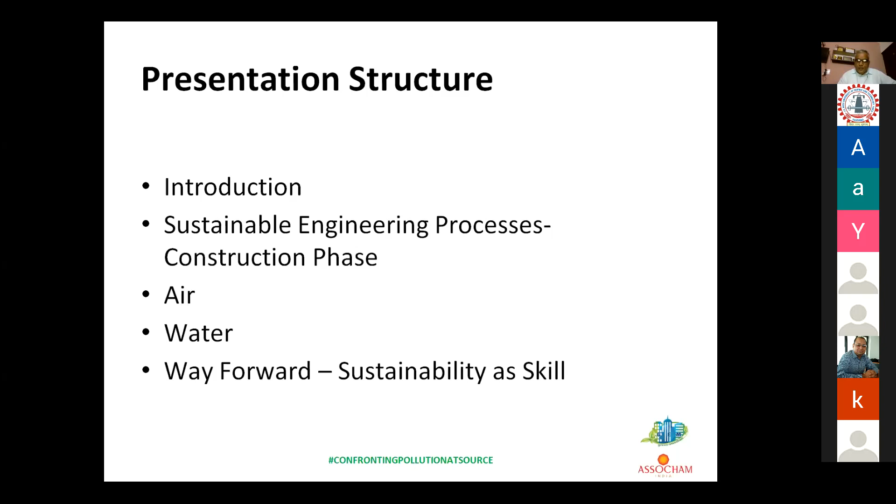This is the presentation structure of my talk today. I thank YMCA Faridabad as well as the team of GTS. I'll be talking on sustainability during the construction phase. We'll follow this structure: I'll do a small introduction about sustainable engineering processes and what the construction phase is, I'll talk about air and water and how they get affected during the construction phase, and I'll talk about the way forward for sustainability as a skill. I'm a civil engineer and I've been doing lots of projects, so my program is more on sustainability and construction as such.

We have been hearing a lot about green buildings, smart cities, green cities. So what's the process of a project? Whatever is happening, whether it's infrastructure or real estate, the project goes through three or four phases predominantly. First is the design phase, when designers and owners get involved and set the context for the project. The design phase is usually 1 to 2 years, when the details of how the project will shape up get decided. Over the last 20 years, sustainability has been in question in the domain of construction. In the design phase, somehow architects have built capacity, and many bodies like IGBC, ASSOCHAM, USGBC and GRIHA have come up with rating systems. So in designing a project, people are talking about sustainable design and efficiencies for water, energy, and waste management during the design.

I will skip the second part because that's our topic. During commissioning, people commission it to the design. And during the fourth part, the operations and use phase, we can see a little bit of effect, although if we get into the details, there is very little capacity building in terms of the end user. Many end users don't know how to use that green building or how to maximize its efficiencies. So in the operations part, a lot of capacity building has to be done.

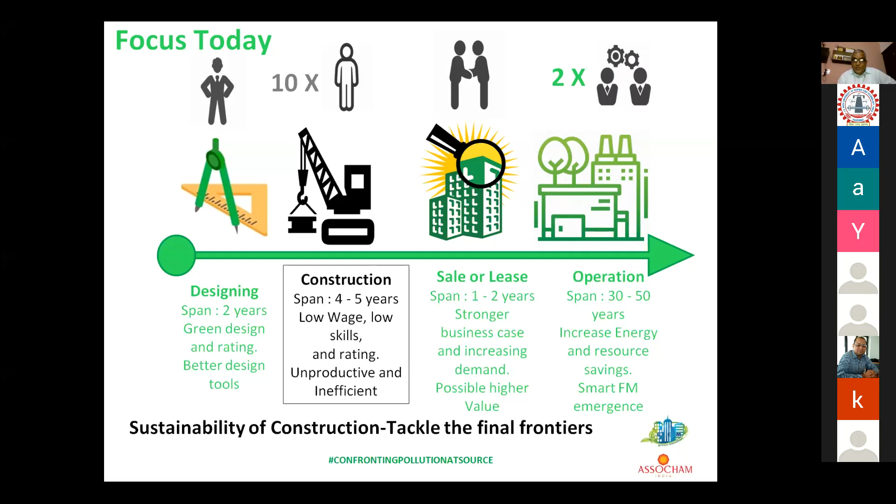If I have to say, I'm sorry to say this, but even the bigger companies—I'll give you examples as I go through the presentation. So the fundamental issue is: we design a project as a green project, operations is a green project, but we work in silos. We don't construct it without harming the environment, water or air, and even construction and demolition waste as such.

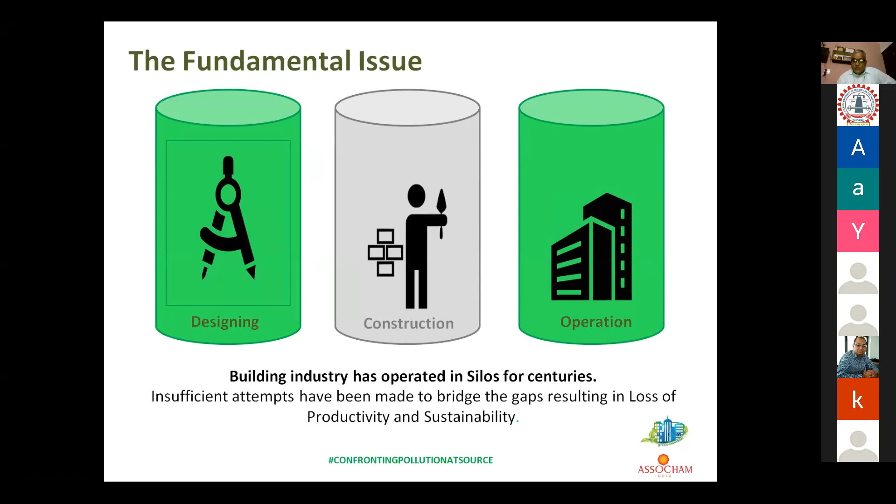Why does this happen? Because all the project proponents work on constraints or risk factors, and if those risk factors connect with the cost or time of the project, people worry about them. But air quality from construction or water for construction are never taken as risk factors—people think they don't affect cost or schedule, but that's not true. I'll explain this as we go along.

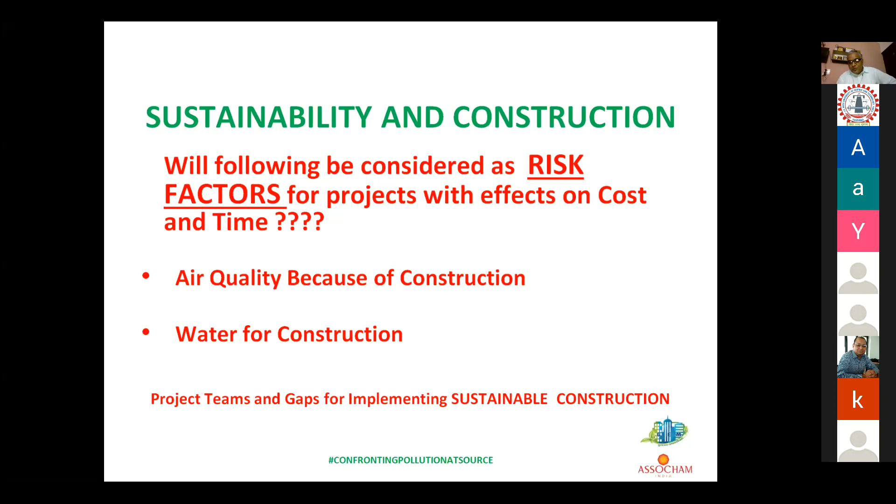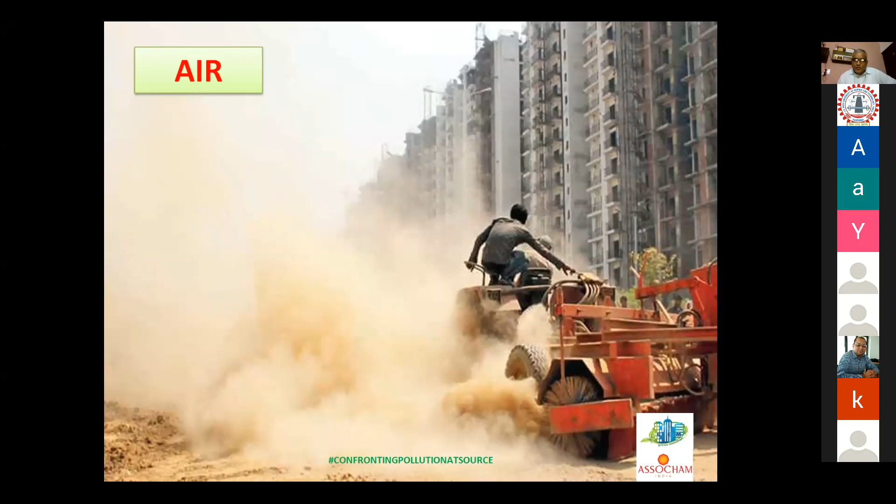We start first with the air part. This is a common sight in Faridabad, Gurgaon, or Noida during summers if you go around construction projects. And this is a common headline in the media during November: as the Graded Response Action Plan of NGT sets in, schools are shut and construction works get stopped in Delhi. Why does this happen? Because PM2.5 and PM10 levels get ahead of what's desired, and the response is orchestrated.

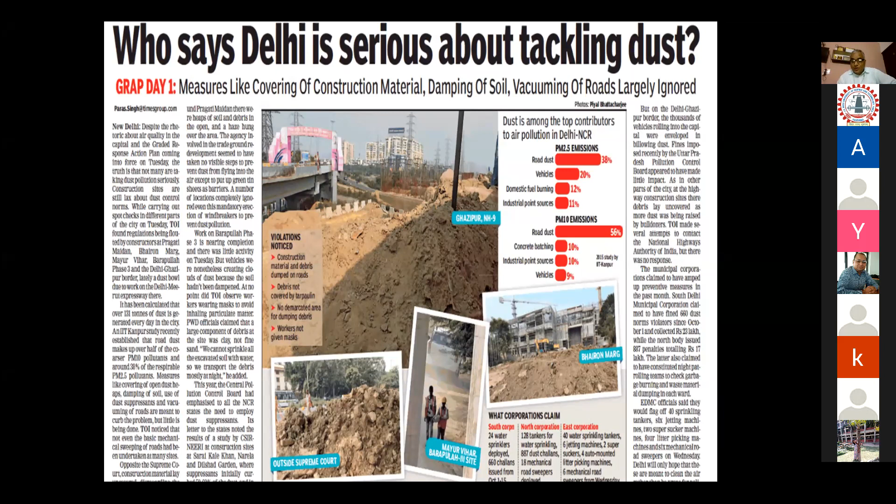This year we will see construction starting for Jewar Airport and Central Vista, the new Parliament building. So will these projects contribute to air pollution or not? It's yet to be seen—or will they do sustainable construction and mitigate construction dust as they build? So what's the real connection between construction dust and air quality?

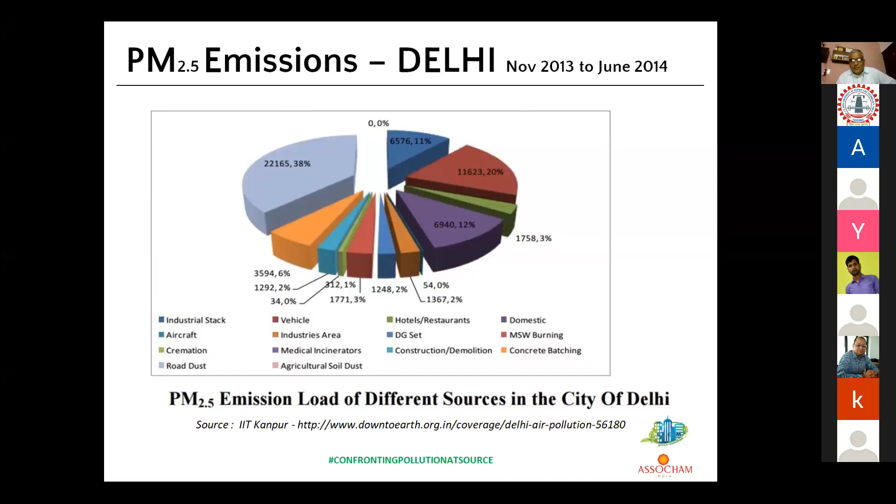This is an IIT Kanpur study. If you see this PM2.5 breakdown, road dust is 38%, and construction and demolition is very small, just 2%, with 6% from batching plants. For PM10, it's a bigger pie—road dust is 56%.

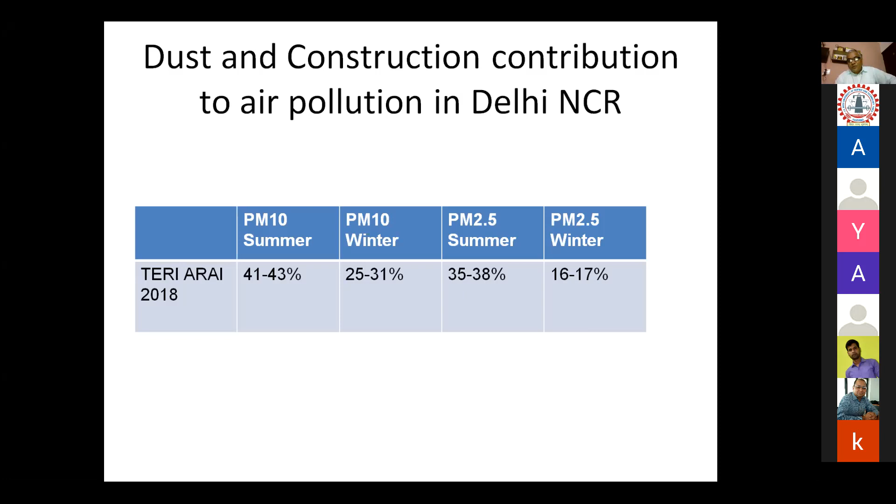Why is this happening? Because there are no studies available, no construction companies coming forward saying, 'We can show you the way of constructing where we can mitigate this, where we won't contribute to that—let the construction dust not escape from the construction boundaries and go out.' Please remember, once construction dust crosses the construction boundary, it becomes road dust or dust in the atmosphere—outdoor air quality. This is why we call dust a problem.

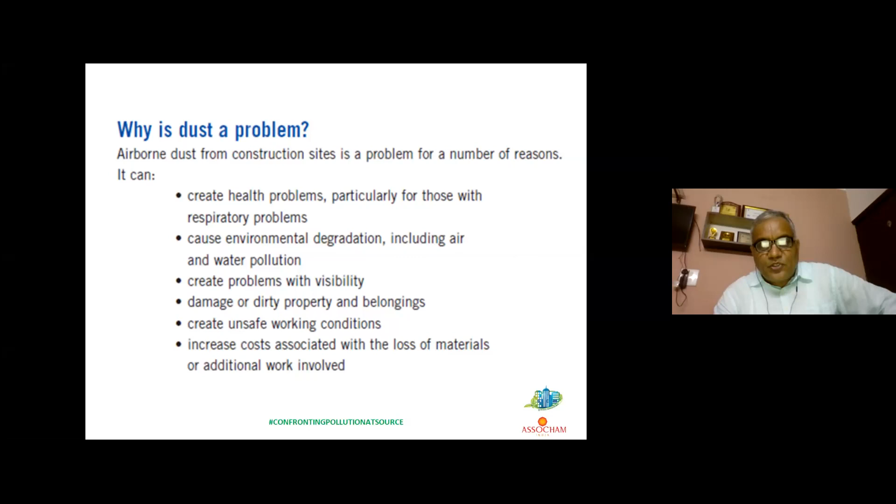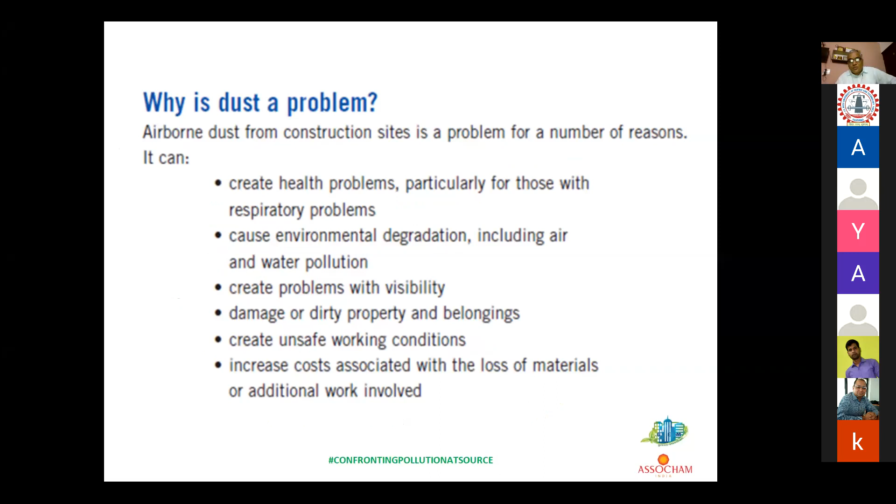Airborne dust from a construction site is a problem because it creates health problems like respiratory disease, causes environmental degradation, air and water pollution, and problems with visibility. It damages and dirties property, creates unsafe working conditions within the premises, and increases costs associated with loss of materials or additional work. It's caused by demolition activities, site preparation activities, vehicle movement, and uncovered stockpiles—these are a few of the reasons it happens.

So what are the constraints? Why are we unable to work on controlling construction dust so it doesn't leave the construction premises? In India, climate and weather is one constraint because we live through many climate zones. Cost is again a constraint because we try not to spend money on environmental aspects. Limited knowledge is also a constraint because nothing is happening or nobody is talking about this during studies, during internships, or while projects are happening.

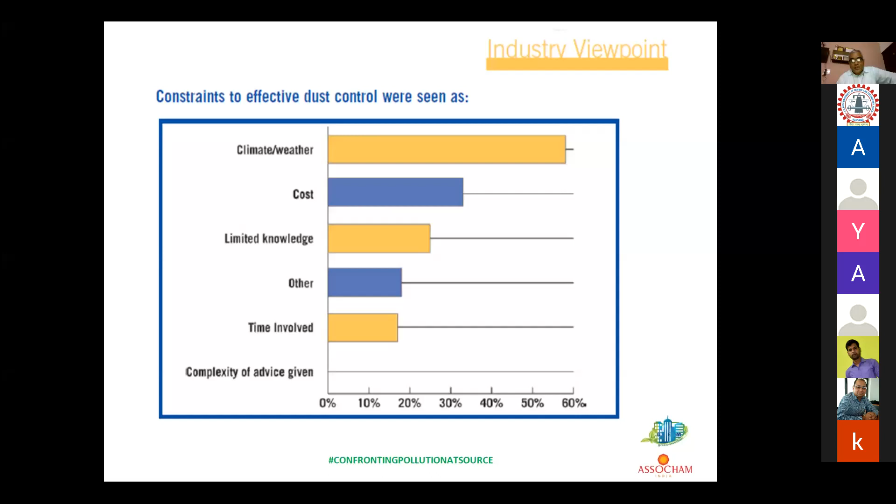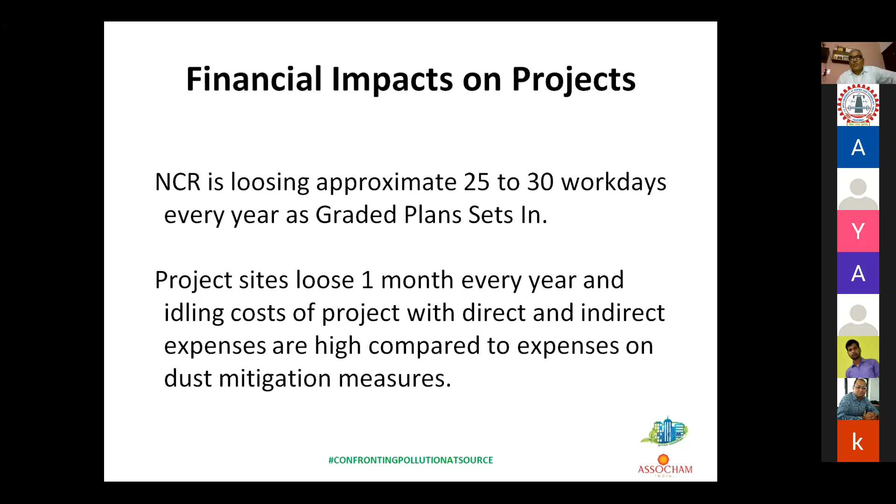Time involved is again one of the constraints. Coming to the financial impacts, every year 25 to 30 work days are lost in NCR, and the same will be the condition in 122 non-attainment cities in the National Clean Air Programme. Project sites are losing 1 month every year, and if it's a 5-year project, it gets extended by 6 months, adding a minimum of 10% to the cost of the project. If it's in the contractor's scope, the contractor loses his construction margin. If it's owner's scope, then the cost of construction goes up.

So what are the ways, and why are things not happening as they should be? Why is sustainability not setting in? The National Building Code mandates monitoring of air quality during construction twice a week. Trust me, I've been working on this subject for the last 5-6 years, and nowhere, none of the project sites have these outdoor air quality sensors. Once they don't have outdoor air quality sensors, nobody knows what the air quality is within the project premises.

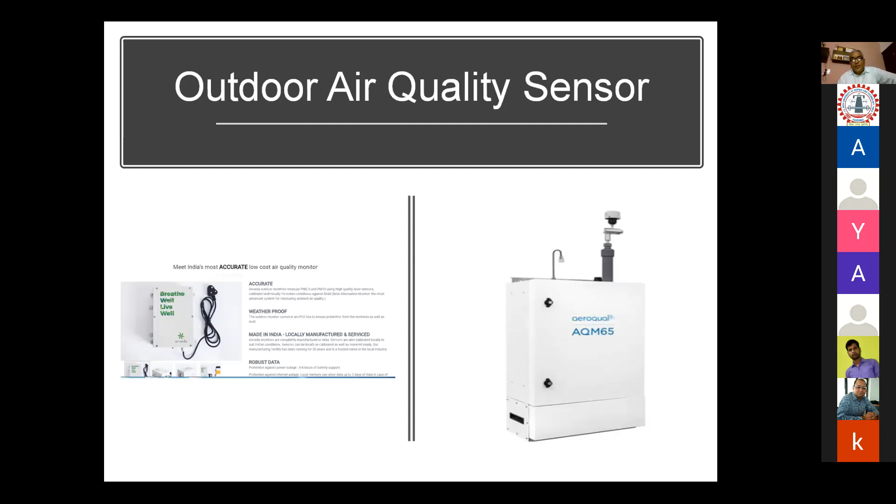So whatever is happening at projects, because nothing is being measured, there is no data, nobody can go to the Supreme Court or NGT. Even bigger companies like L&T can't go to the Supreme Court and say, sir, the outdoor air quality AQI of Delhi was 200, but within my premises it's 175, please allow me not to stop the work, because we are not measuring the quality of air within our building projects. We are doing fogging.

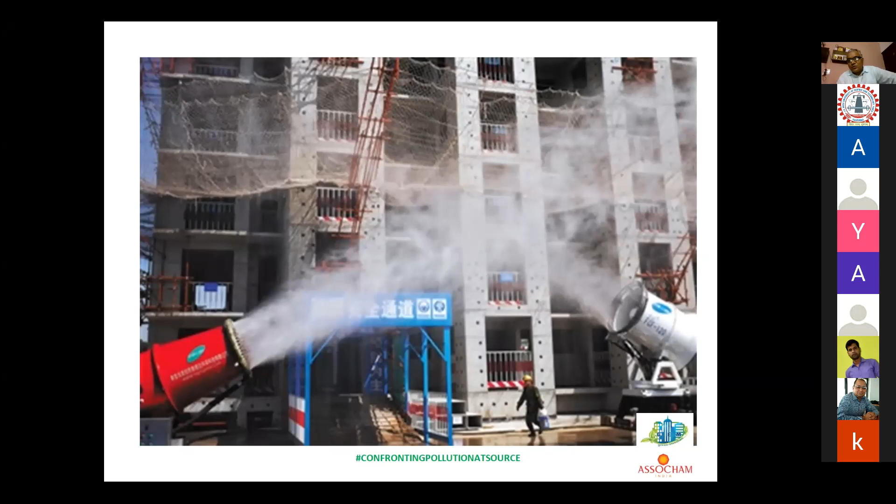These fogging machines have been mandated, but again we have limited knowledge of how to use them and which activities are producing the construction dust. Capacity building of project members, the people working on the project, is lacking. Nothing is being taught, even in educational institutes, about air quality, construction dust, and tackling construction pollution. There is no subject on this at all.

This is fogging during the demolition that's happening. These photographs are not from India - you can see them, you can feel them, because this isn't happening in India. We are ready to copy elevation or designs from how construction happens outside India, but we are not happy to construct the way they construct.

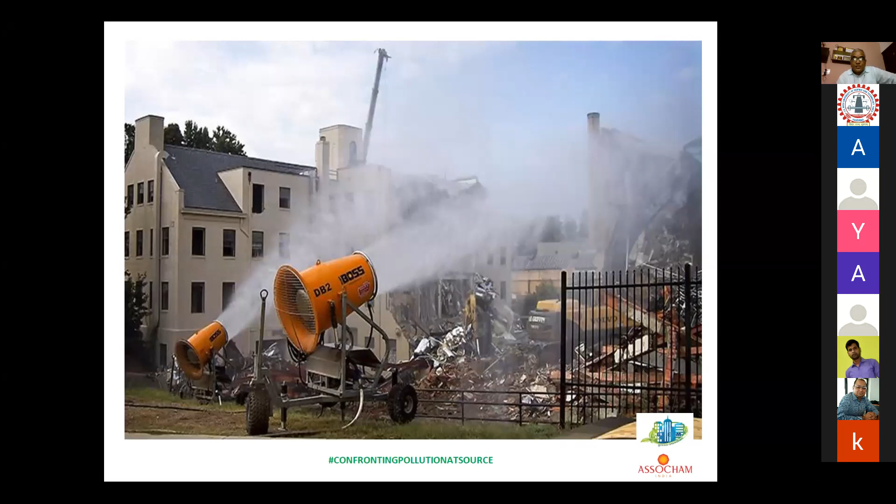They use this machinery to their advantage. We are glad to share that the Delhi Metro procured one last year, and this machine, a fogging machine, was installed at a construction site at Dwarka. Now these are a few of the things which we can do.

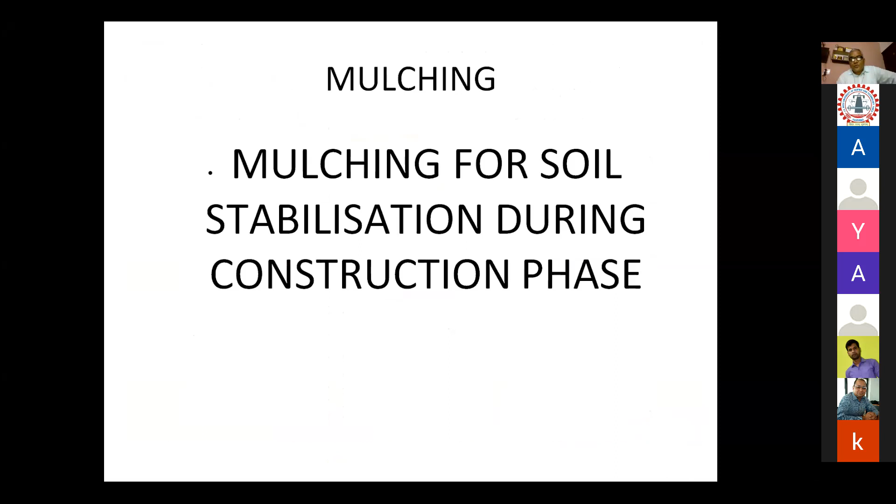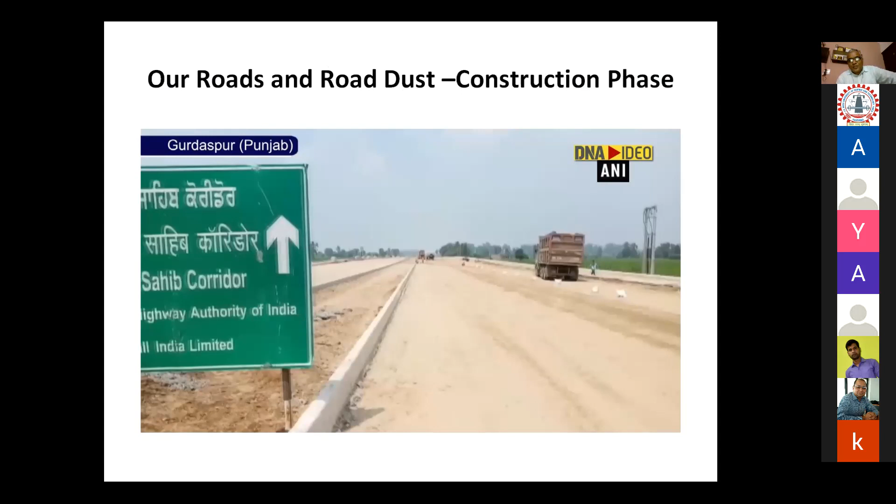I will show you the common techniques which should be used for tackling construction dust. This is how we do construction - this is a photograph from the Kartarpur Sahib corridor, a very big named project that happened in Punjab. This is how we did our construction, and this is how construction happens outside, where mulch carpets are placed so that the loose soil doesn't get into the air and doesn't contribute to the air quality inside.

We are troubled by the burning of plants that happens in Punjab or Haryana during winters, and the same material can be used to construct these mulch carpets - the leftover pieces from the harvest yield, or what we call rice roots, that remain and that farmers burn. So this is the same thing - we need to create the mulch carpets.

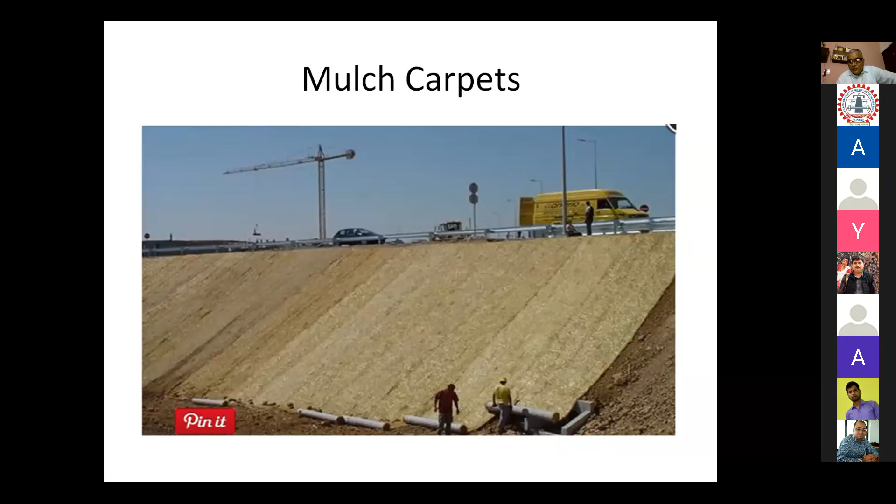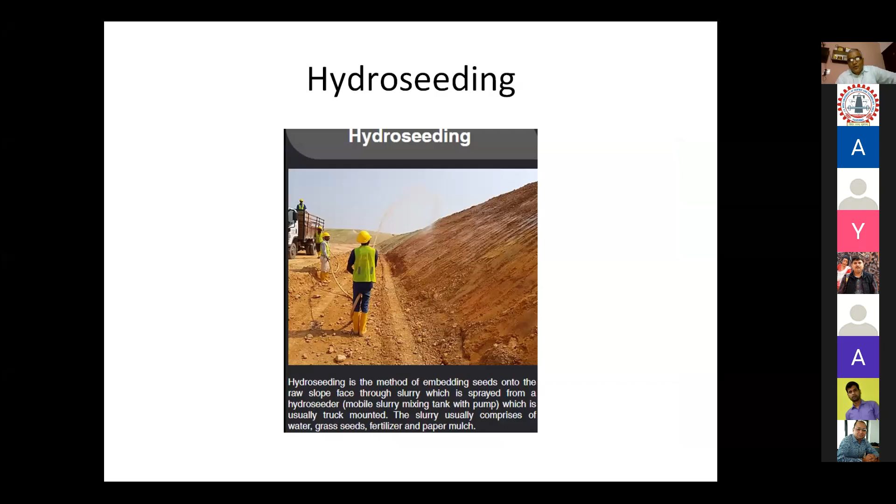Hydro seeding - we don't do hydro seeding. It's a very simple process to stop air, to control the loose soil, control the air. It's very effective - the cost comes to less than 0.50 paise per square foot, but nobody uses this, similarly hydro mulching or soil erosion control. These are a few of the techniques which can be used in India, and we can work on sustainability during the construction phase for air quality. This was my first part.

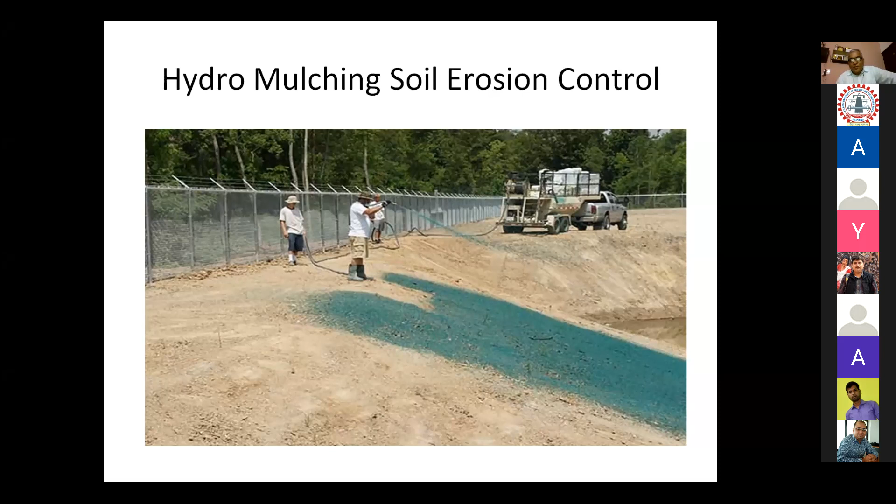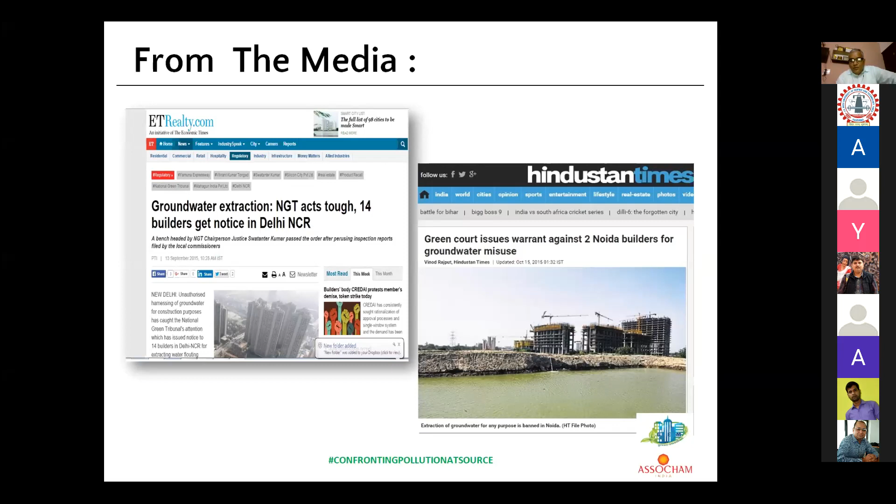Similarly, I will do a small discussion on water also. Groundwater extraction has been banned, and in NCR and many places in India, we are not supposed to withdraw or use groundwater for construction. In Noida, we are losing 3.87 meters of groundwater table every year.

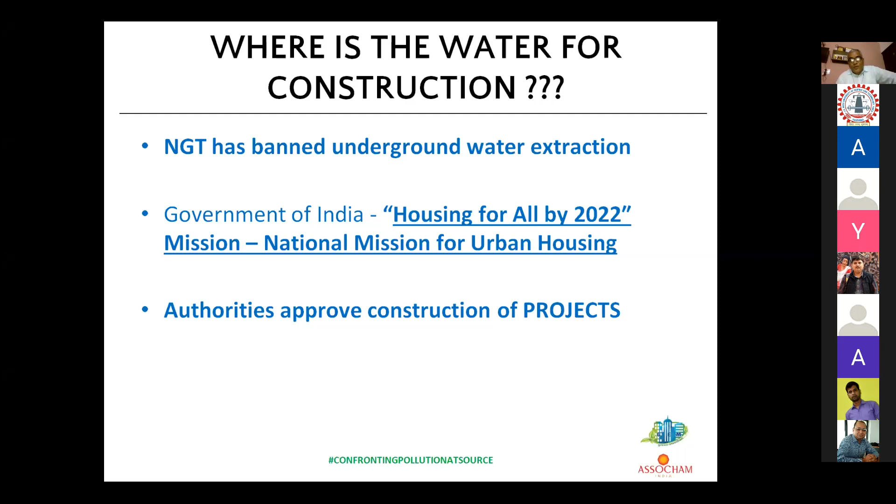Now, where is the water for construction? If we have banned underground water for construction, and the government wants to do housing for all, there's this Smart Cities mission where lots of infrastructure has to come up - if there's no water to be extracted from underground, and we don't have water in rivers, from where will the water come for construction? The question is, how much water do we need for the construction?

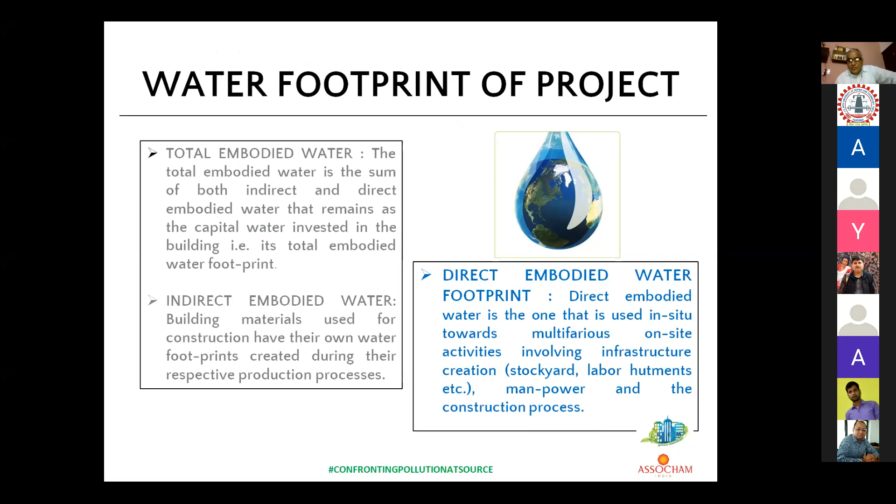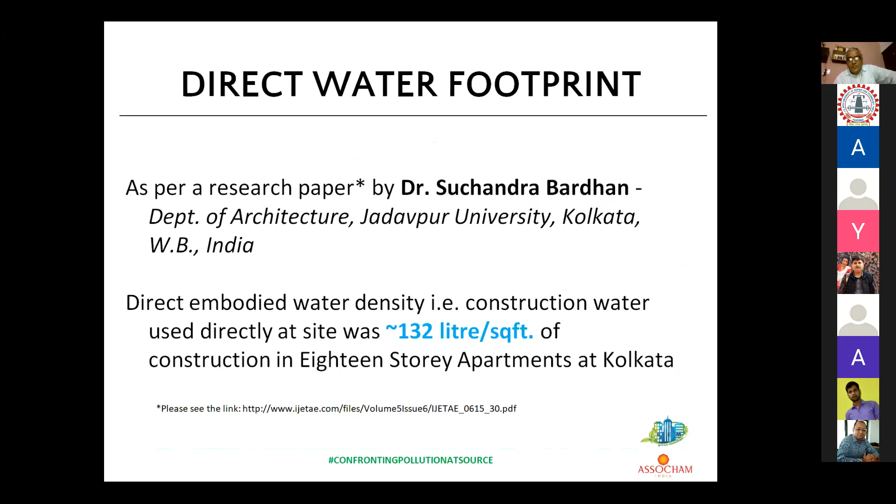No studies are happening on this; there are very few studies. Only 3 studies worldwide have happened, and one of them is from Jadavpur University by Dr. Suchandra Bardhan, who concluded that 132 liters per square feet of water is needed for a multi-story construction. She did this study in one of the multi-story apartments in Calcutta.

I did a few pilot studies looking into the theoretical requirement of water based on water-cement ratio, and I found that we need only 60 to 70 liters per square feet of water, depending on factors like where the batching plant is located, or if the workers are staying within the project site or outside. So there was a scope of saving 80 to 100 liters per square feet of water.

I did a study in Greater Noida with one of the leading builders, I won't take the name. The theoretical requirement, allowing for 20% wastage, was 60 liters per square feet of water, but they had consumed 250 liters—4 times what was needed. So 3 times the water they used was wasted.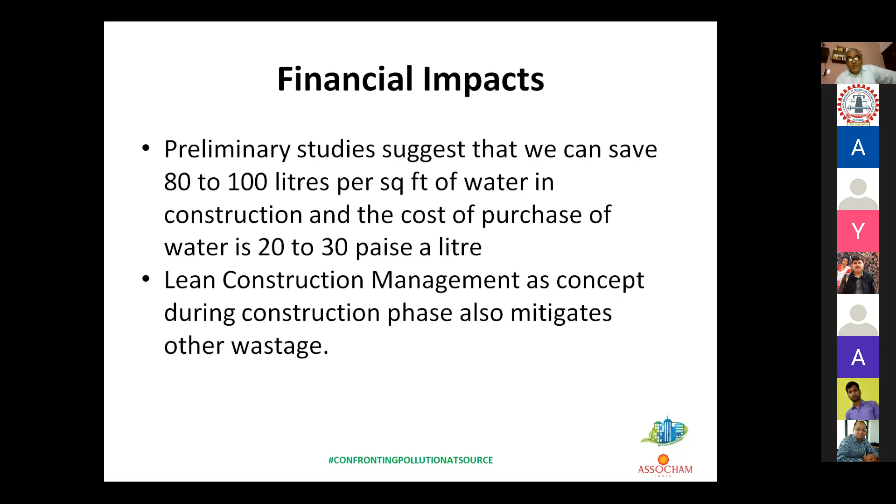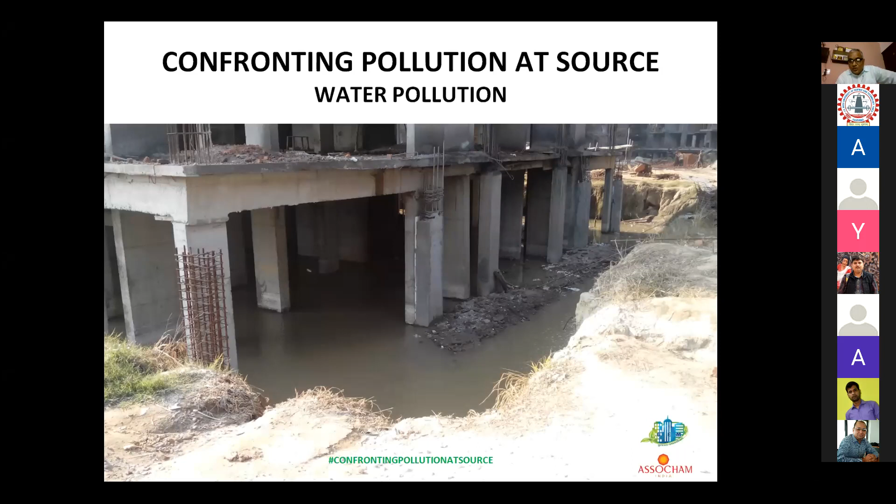So if the water is getting wasted, where is that water going? If you go to a few project sites where water is being wasted, you will come across scenarios where water gets stranded in the basements, or water puddles form during construction. This is all water that was not needed to be spilled at a project site.

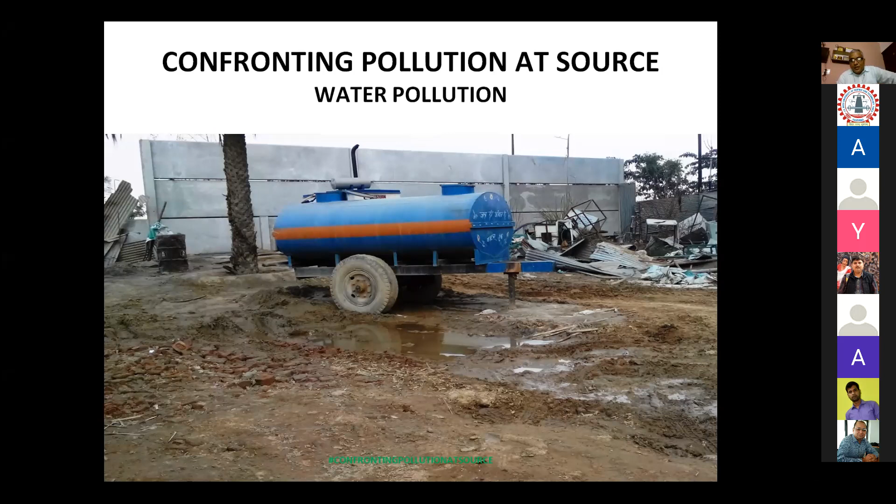So I've shared the problems of sustainable construction practices. What's the way forward? It is efficiency improvement for all teams towards sustainable construction practices, creating awareness with site staff and site execution teams, following intelligent utilization of water during the construction phase, and measurement of energy and water consumed during construction. In sustainability, we very well say that whatever is not measured cannot be managed.

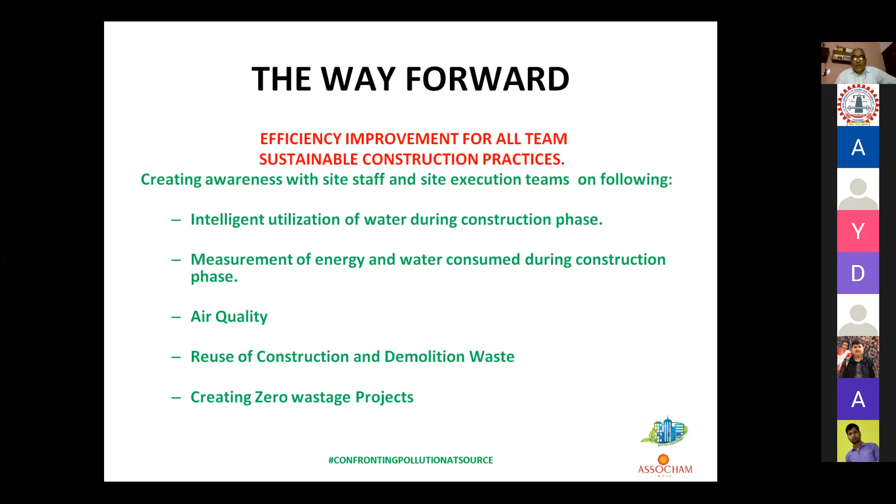About air quality and reuse of construction and demolition waste—somehow I wish to get to a concept of zero wastage projects: projects which don't waste water, use only the optimum energy required, don't disturb air quality, reuse all construction and demolition waste, and are zero harmful to the environment. And this is one of the problems.

In top management, we have very few highly skilled people. Mid management is moderately skilled, and supervisory staff skill levels are very low. Whosoever engineers come out of our engineering colleges have no skills per se in sustainability and construction—nothing is happening at the education level, even in whatever we teach them as interns when they join us for projects.

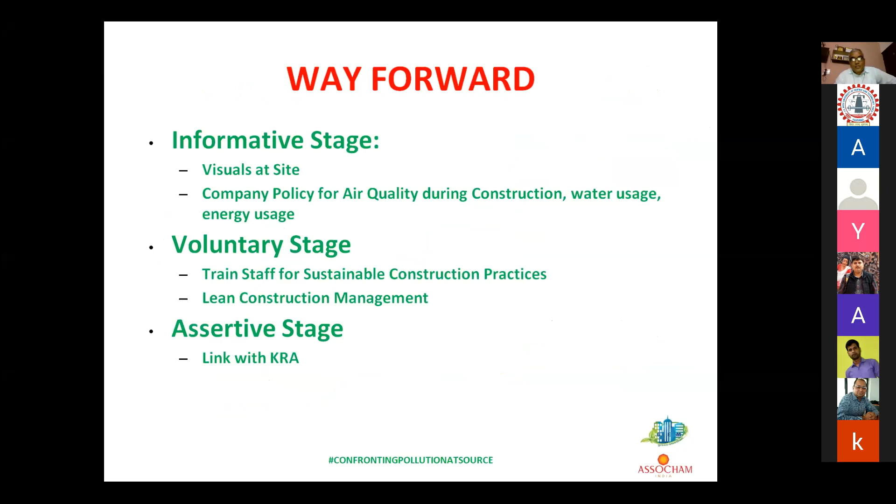Then the next stage is the voluntary stage, when we train staff for sustainable construction practices. We talk about lean construction management, which addresses wastages happening at construction sites, and we link these with their key responsibility areas so that they take them up as their own responsibilities. So we need to have these visuals.

There are very few visuals. You will go to any project site, but nobody will be saying 'we are a zero wastage project' or 'we care for air quality during construction.' You won't find these posters, but we are trying to work on this.

So this is my talk, and in the race of excellence, I say there are no finish lines. Thank you.